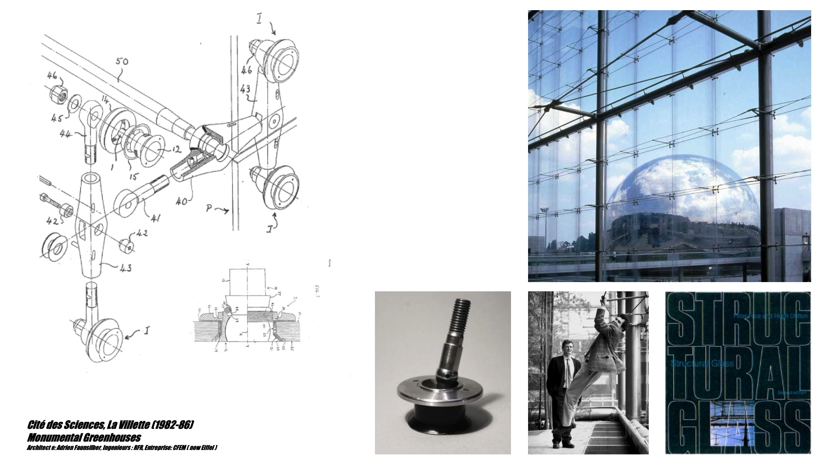First, just a brief introduction of myself, my own background. I'm an architect. I went to the AA in London, and when I finished the AA studies, I decided to come and work for an engineer, because I felt that as an architect, you need to understand how to build things, how to make things.

So I had the great fortune of working with Peter Rice, and the first project I was working on was the Museum of Science and Industry at La Villette, and we invented this system of cables and suspended glass. And it was quite an experience then, mixing engineering and architecture.

And that was what Peter Rice set out to do at RFR, together with Martin Francis and Ian Ritchie. It was, as he said, to create a laboratory for mixing the disciplines to create holistic design. And I think that's the bottom line here. It's holistic design which marries engineering and architecture. And I worked with Peter until '92, when sadly he passed away.

This was the last project I worked on with him, and natural light was very much a part of this project, because it was marrying natural light with natural materials, with stone. So it's the west front of Lille Cathedral. The cathedral is recent, it's a 19th century cathedral, but it had never been finished.

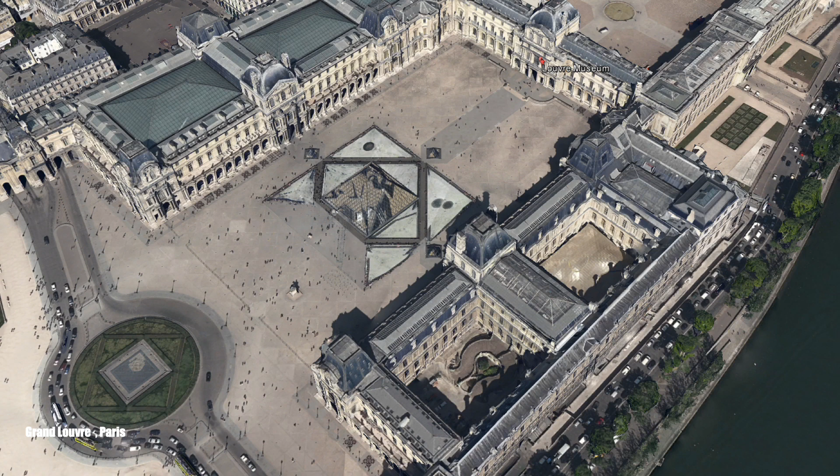So now I'm going to talk a little bit about another project I had the great fortune to work on with Peter. Peter Rice was asked by I.M. Pei to work with him on the Louvre Museum. We helped him initially on the pyramid, but then the upside-down pyramid, the inverted pyramid, was something that Pei asked Peter to work on personally.

And it's interesting, again, in this project, all of the interventions, the Grand Pyramid, the inverted pyramid, the Cour des Finances skylights, and the one I'll talk about in more detail, this one here, the Arts de l'Islam, they're all interventions to transform a palace into a museum. And again, that's what we're trying to do in the Hôtel de la Marine, to transform a historic monument that was the center for the Navy into a public space where people can understand it and the building has a new life.

This slide, I find, is very representative. It's lovely. The inverted pyramid is really a work of genius by Pei. Using 98% transparent, low iron glass, which becomes a reflective surface. So it's both transparent and reflective, sending in a maximum of daylight. And then also becoming, because it's at 45 degrees, a mirror.

So when you're in one of the corridors underneath in the space at the Louvre, you see this brilliant reflective diamond at the end. And it's just because of the angle and the reflectivity. It really is very, very clever. And so you get direct light projected through the pure transparency, you get the reflected light on the glass, and then you also get this incredible play of iridescence, where the light is refracted and sparkles and gives another meaning.

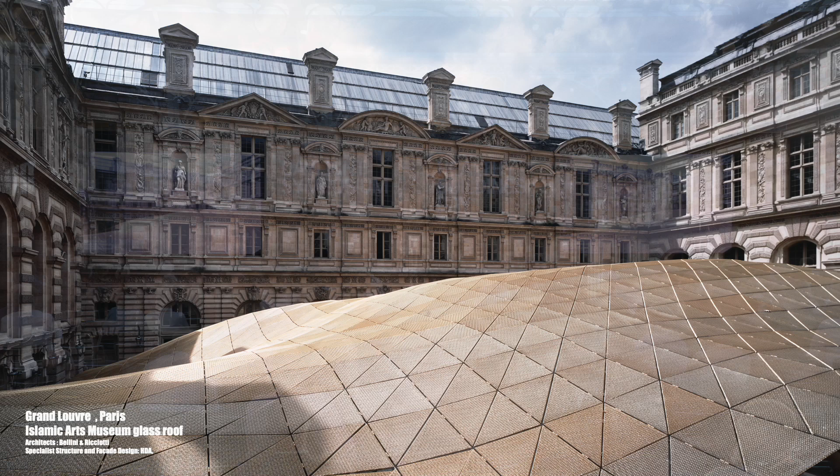So I was then asked by Rudy Ricciotti and Mario Bellini to help them design the roof for the Islamic arts collection in the Louvre, the last courtyard, the Cour Visconti. And it was a pleasure to work with them both and to do this project, which is the most recent intervention into the Louvre. How do you create something contemporary in a monument as historic and as grand and untouchable, if you will, as the Louvre?

And so the idea was to create a contemporary counterpoint, something that's fluid in movement. Its textures pick up the textures in the stone, and the fluidity is a very, very interesting balance to the stone. So this little conceptual sketch of how it works: what we did is create this mesh of steel structure, thick where it needs to be, where it has the support, and thin on the edges. So virtually you only read this thin leaf of roof. The whole structure is transparent for light.

Light comes through the meshes on the top, it comes through the glass, and then it's filtered through an inner layer, which I'll show you later, which masks the structure, so you never actually see the structure. The columns are inclined to give a sense of drama and dynamic, along with the same fluidity of the roof. There's no structure in the facades whatsoever. It's pure low iron glass, so the whole roof appears to be floating.

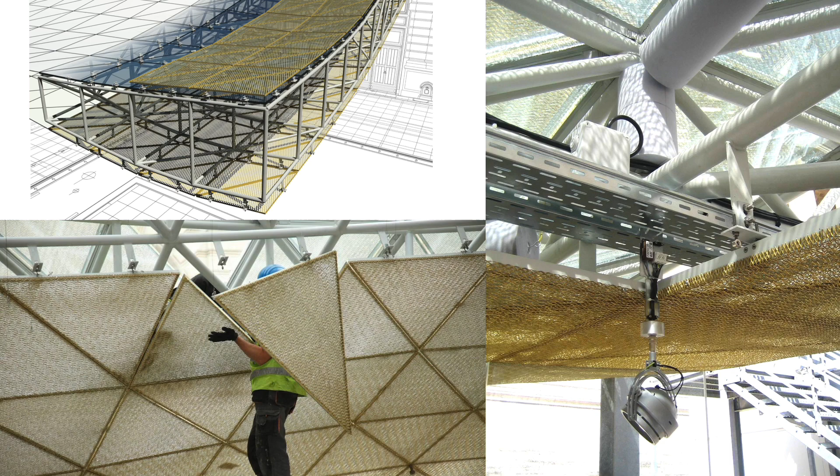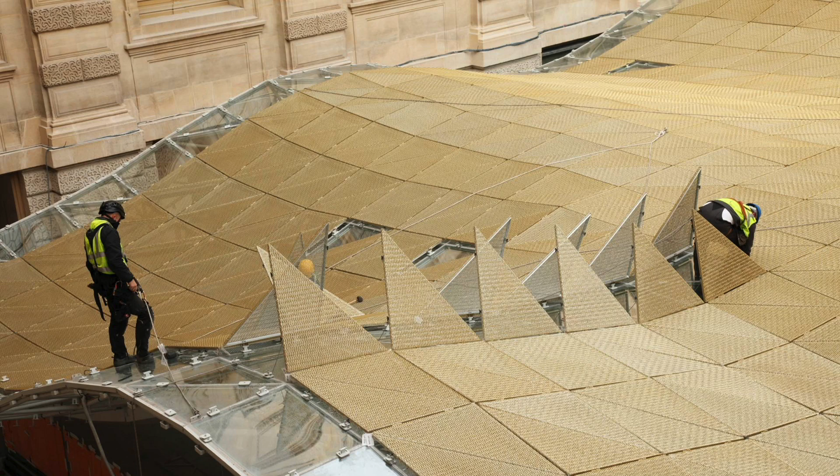But one of the important details is the mesh. If you see that down at the bottom, there's a honeycomb mesh which filters the light, and I'll show you that later. So this is how it goes together. There's this mesh of stainless structure, and then the mesh that filters the light and hides all the stuff up in the roof. Then we didn't want the pure glass, reflective glass. We wanted this soft mesh that was much more compatible with the stone of the courtyard, operable so you can clean it.

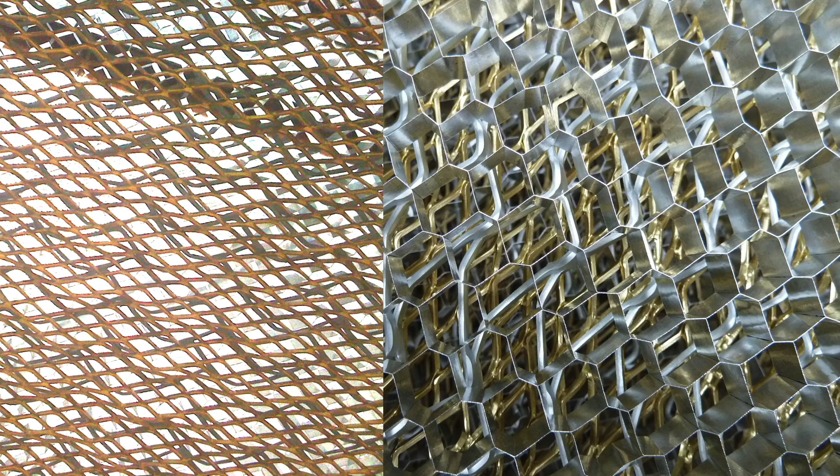And this is the detail of the mesh. On the left is what it looks like from underneath, and on the right is what it actually is. You've got this honeycomb of aluminium which directs the view, so you never actually see the structure obliquely. You only get the light that comes down through it. It's a very simple device, but it works extremely well. So that when you're in the space, you don't actually see the structure.

You just see the mesh, but if you look through it, you actually see the facades, which is an important part of what they wanted to do. So from inside, you get this general feeling of a light, floating, luminous veil, which is what Mario called it. He wanted this luminous veil to be floating.

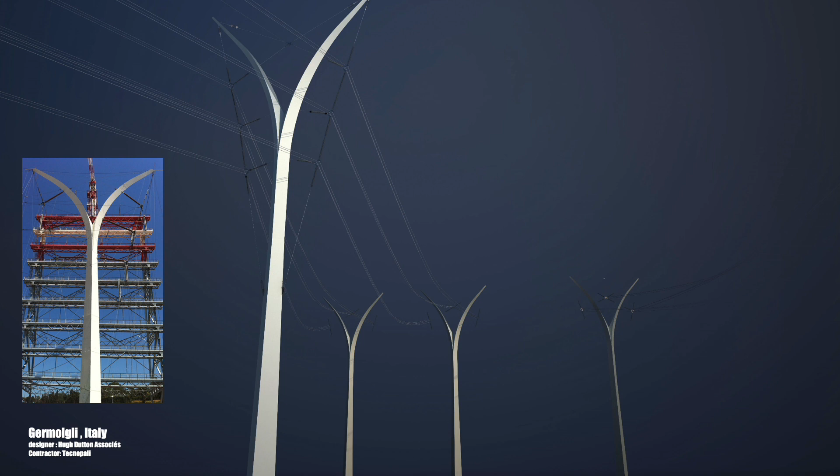This is just a little thing. Also, I won a competition to do some electric pylons. And here, I'm just showing this slide because it's obviously cheating in a way. It's in Italy where this light is so strong. But the way we crafted the steel, you get the sharp edges and the shadows. You get the bold light and the dark shadows that bring up a very, very bold expression of what we're trying to show here.

The theme for these pylons was germoglio, which means a green shoot. So we wanted something to make these steel pylons look like leaves of green shoots. So in the landscape, you see these very thin, slender, light forms. And it's just a simple thing of looking at steel, looking at how you can detail it.

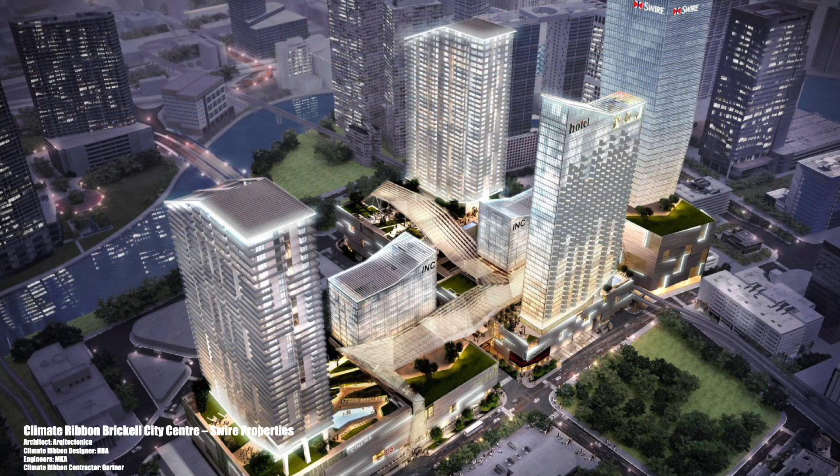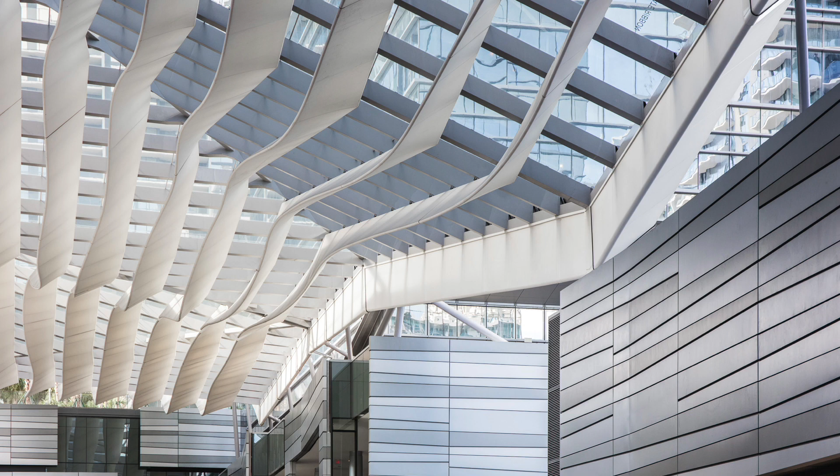Another project I want to go through quickly is the Climate Ribbon in Miami. A project I did with Bernardo Fort-Brescia of Arquitectonica and Swire Properties, where we were asked to develop this roof for a pedestrian street that's elevated above the urban vehicular streets. It's a shopping center, to make a sort of world for pedestrians that has a microclimate of its own within the climate in Miami, to try and make it as pleasant as possible within the context of the Miami

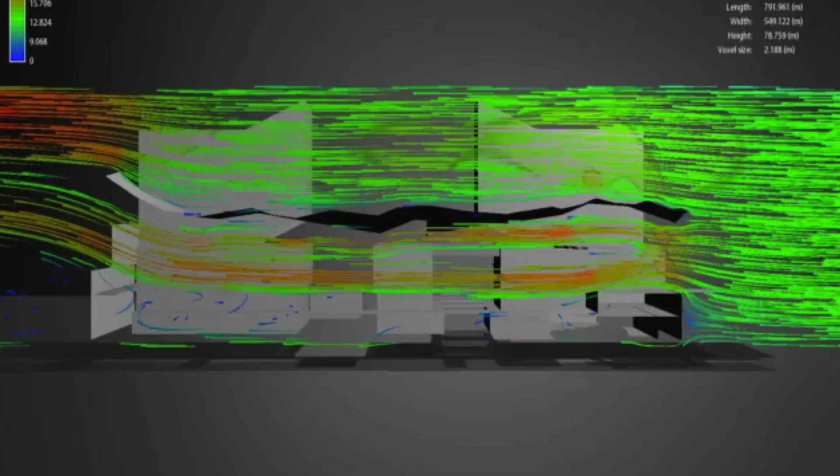weather. So we created this system of blades that protect from the sun. In the east-west direction, the blades are protecting from the southerly sun, and the north-south one is protecting from the westerly sun. So the blades were a logical choice for that direction. And then we also shaped it so that the roof actually captures the breeze that comes off the sea and funnels it through, slightly accelerating it. So you always get a feeling of slight breeze moving on your skin, and it gives a sense of comfort.

It really does work. You go there and you feel the breeze, you feel much more comfortable. It can be hot, it can be damp and humid, but when the breeze is moving, it makes a difference. And then also, we did a parametric study.

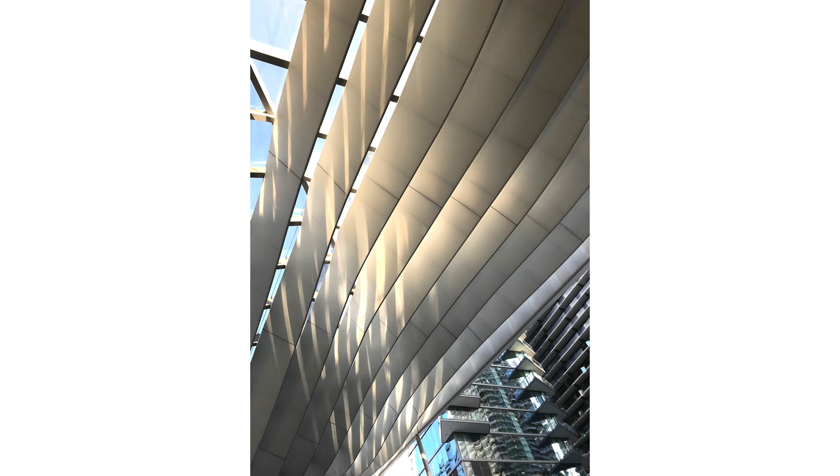Sébastien Perrault of my studio did this, which was simulating the angle, a parametric study, and we've seen a lot of that today: every little triangle that's created is what informs the shape of the blades. So then we played with the blades, made them more fluid, made them more sculptural, because in the end, what you see, the visual parametric, is the one that's most important. And so we wanted to get this feeling of fluidity, expression of wind, expression of nature.

And also when the clouds go over it, people ask me, does it move? And it's actually just because of the way it picks up the light and it responds to the daylight. We're always able to see the sky, but it has the sense of moving. So this is another inspiration for us for the Marine project, just dealing with daylight. This diffuse daylight, reflecting it, playing within it, making a sculptural effect out of it.

And it's then become sort of a sculptural piece for them. It's become a symbol for them, for the Brickell City Centre. And it becomes an icon then of nature, of wind, and of the sun. So the Marine project itself, I was asked by Christophe Bottineau of 2BDM and the CMN to work together to design this roof with them. And it's been a fantastic experience.

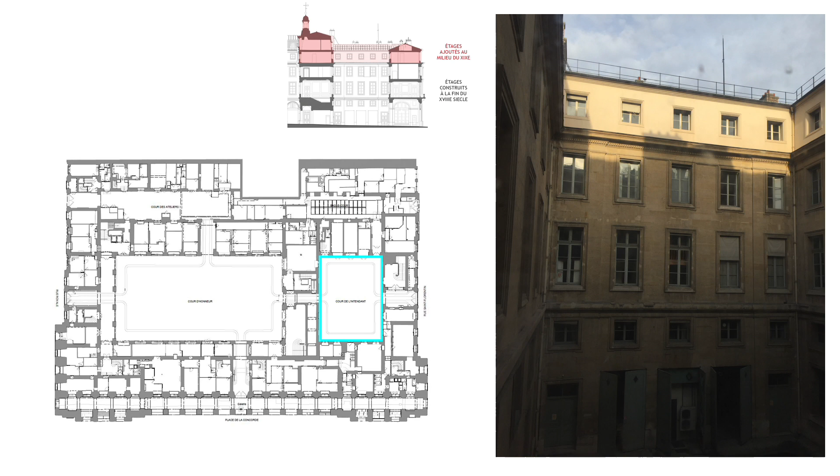It's the Hôtel de la Marine on Place de la Concorde. It housed the Marine for many years, and it's now being transformed. The Marine is now in the 15th arrondissement, and so they're transforming the space into a cultural facility, and so it's no longer offices, and you need a courtyard, you need an entrance, a new entrance.

Also, the original building by Gabriel was added to. So that little diagram up here shows the top floors were actually added later on. And on the right is the courtyard they wanted to use as the main entrance. So it's a dark courtyard. The attic levels that were added actually cut out even more daylight. So it was quite dark and needed attention.

So the first thing we did, you've seen all these simulations today, was to use this desktop software that we download and that the young team at the studio use quite efficiently. In the winter, no direct sunlight gets to the bottom of the courtyard. Even in March, you only get a couple of hours in the courtyard. So that was the problem, how we improve the daylight.

And another thing that inspired us was the finishes of the Marine. The interior design of the Hôtel de la Marine is absolutely splendid. These incredible chandeliers and gilded decorations, all about light, again. It's bringing in daylight, letting that brighten our lives. And the way the chandeliers work is they take a candle and just bounce the light around, reflecting it endlessly. So we thought that this would be an interesting model for us.

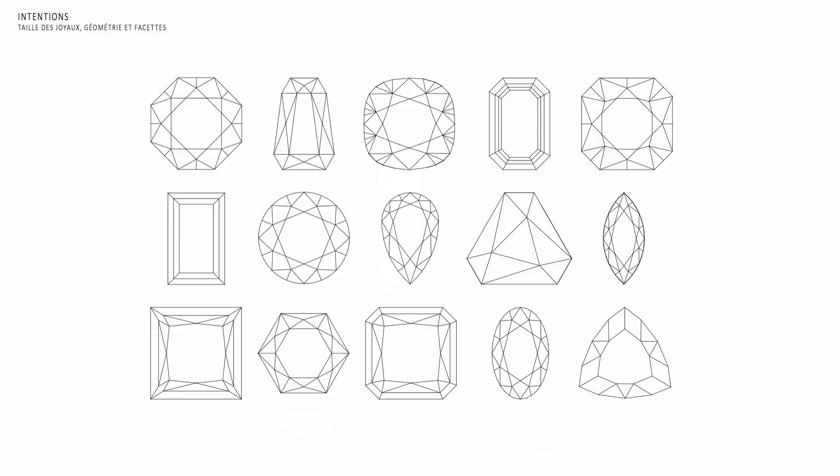And the geometry, this radial geometry, the grandeur of this, how do we do something today in this context? So we looked at jewels. Jewels do the same thing: the facets of the way the jewel is sculpted bounce light around, sparkle, refract it, reflect it. So we also then looked at the geometry. Jewels have this beautiful geometry. And so how we can compose the structure inspired by this sort of geometry.

So this is a plan of the skylight as we're doing it, or actually, I think the better word is a daylight chandelier, is what I want to call it, because we're trying to simulate the chandeliers of the existing Marine but using daylight instead of candles. So the structure is four triangles that are just opened up to make a pyramidal surface. And then on the edges, the hips, if you will, of the pyramids, those are open.

There's no structure there. And each of these triangles is propped up with a tie and a strut to try and get the feeling of opening. It's also dense around the perimeter, around the edge. And the reason for that densification is to mask the upper floors that were added later on. And you'll see in the images that when the structure is densified around the perimeter, it masks the direct view of the attics, which were not part of the Gabriel composition.

So the concept of what we do with the daylight is we use a lot of mirrors. We put mirrors around the upper floors, the attic floors. Everything that's red in the little sketch is a mirror. And then all of the structure is clad in mirror as well. So the idea is to try not to cut out daylight, because when you put a glass roof above, no matter what you do, it's going to be shadow.

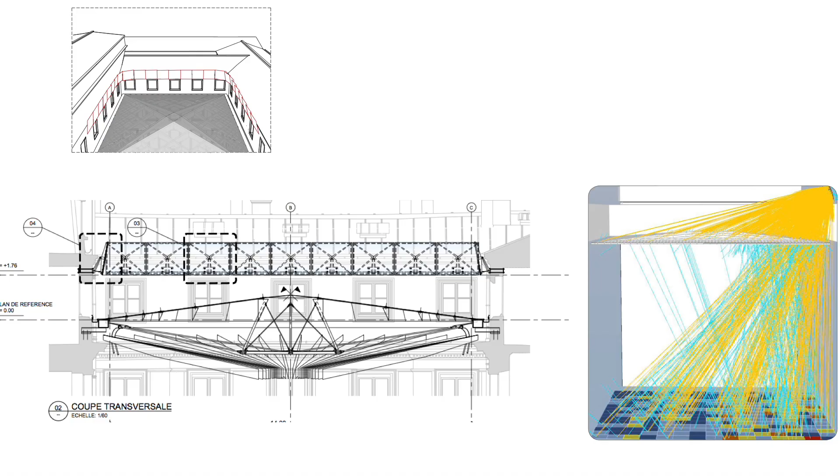So this is a simple simulation that some of the members of my team did. That's Laia Hermela from my team. It shows that on the right, what you get on the 21st of January is the sunlight on a sunny day, but on the left is the simulation of what the mixture of the mirrors and the cladding would do to bounce the light around inside. And you get these wonderful patterns of the way the light is bounced, which reflect the geometry of the skylight.

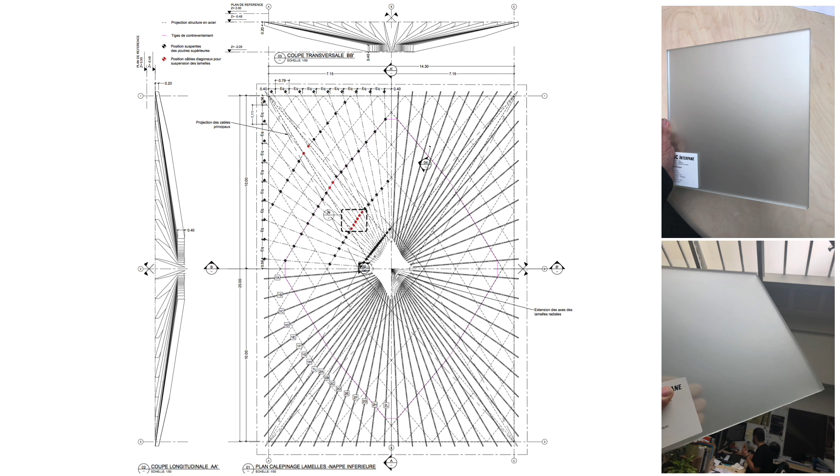And then we added beneath the structure, so you don't get too literal a reading of the structure with the mirrors. We wanted to diffuse it slightly. And Christophe was part of our discussions together; we thought it'd be nice to kind of soften it. And so we've created a radial pattern of diffusers, which are in a slightly reflective frosted glass. The slightly reflective is to pick up the reflectivity, to bounce as much light as we can down.

They're all vertical, so that there's no shadow created. There's just vertical blades. And then the frostedness actually diffuses the structure. You don't actually read the structural grid, so you get this soft expression.

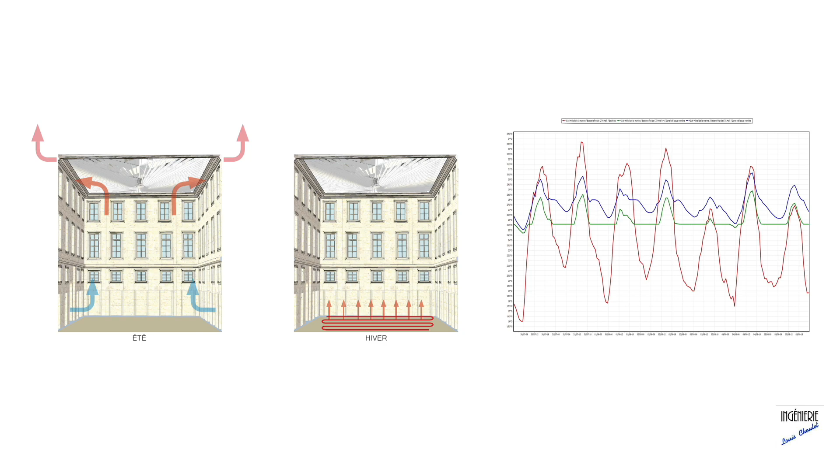And then also the courtyard, this is the Bureau d'études Choulet, who did some very inventive thermal studies and amelioration, not by adding heating or putting on double glazing. We all agreed from the beginning we don't use double glazing. We just optimize the climate the way it is. So the red is the external environment, the conditions of temperature, but by modulating using ventilation and some low temperature heating in the floor, you can actually modulate the extremes of temperature to make it a comfortable space.

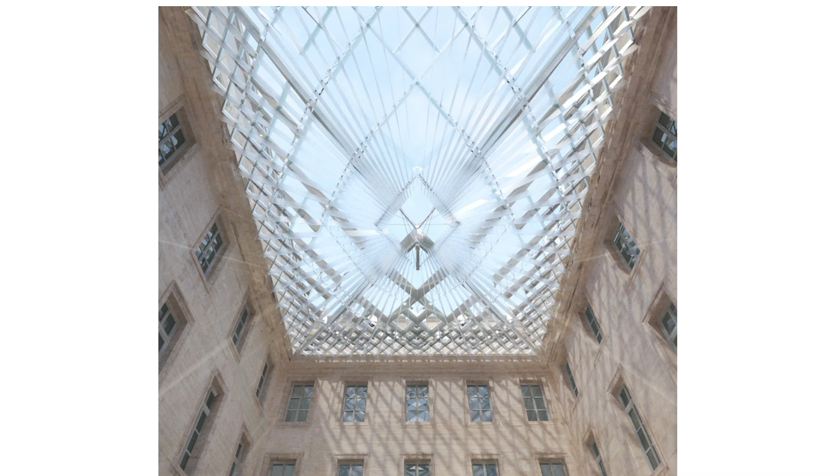So here's a presentation then of the Marine, and I have to say, VELUX Foundation have been an incredible support for us. To have them support us and give us their blessing has helped the project, has helped us, has helped the client, and everybody get confidence. And I think that was the message that Peter Rice gave to me more than anything else. We must have confidence in what we do. Anyway, and this is what it'll look like at night.